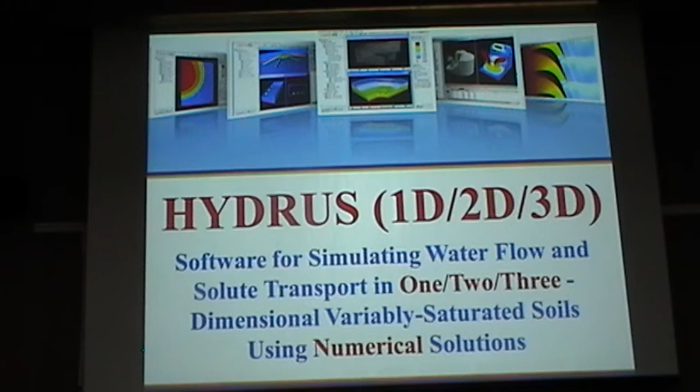Well, so obviously the platform for all this is Hydrus. And so the main thing, at least in the first part of my presentation, is basically to discuss some of these add-on modules to the Hydrus code. And you see here the modules which are currently available. So you have heard a lot about PHREEQC. Then we have a module called C-Ride, which simulates particle transport and particle-facilitated solute transport. Then we have a module called DualPerm, which focuses on preferential flow and solute transport.

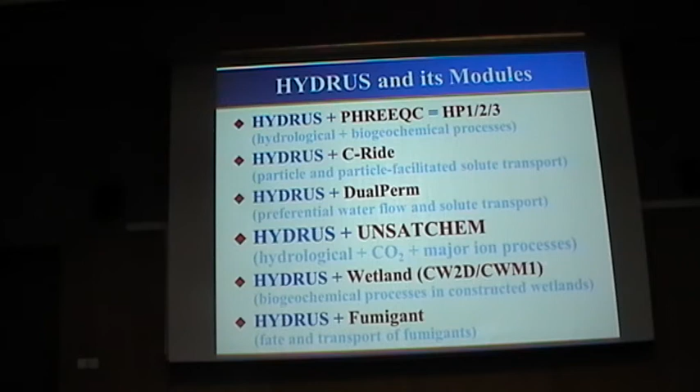We have a module UnsatChem, which simulates, in addition to flow, also carbon dioxide and major ion chemistry. Then obviously the Wetland module, and finally the Fumigant module. Well, PHREEQC, you have heard about it too, so I will skip these slides. I will just mention that most of those who are using FreakC in Hydrus are probably using it in Hydrus 1D.

And in Hydrus 1D we have these text editors where you specify all the input into the code. And we have spent a lot of time last year and dramatically improved that in Hydrus 2D/3D, where we integrated all these editors into one single window, from where you can work with all these editors. And we have provided a list of all the various keywords, which are the words which drive PHREEQC. And so you can simply click here and transfer those keywords without introducing any spelling errors. And we have added also various types of templates, so you can simply edit the text rather than typing it directly, which again simplifies that quite dramatically.

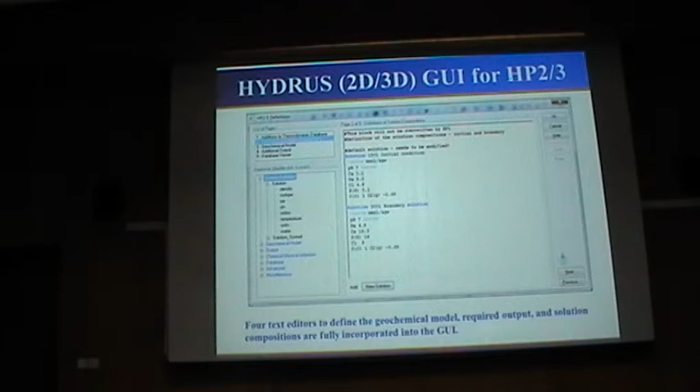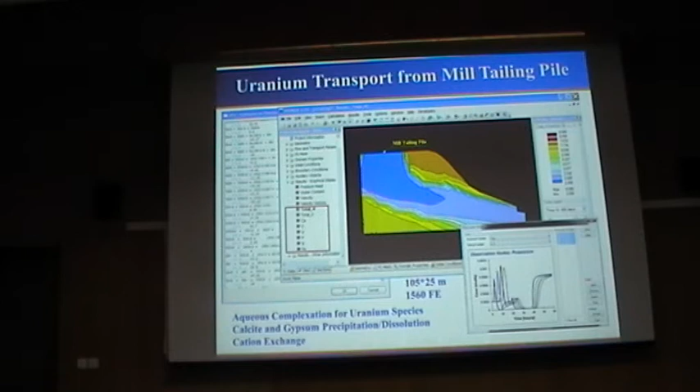And in the Hydrus GUI you have access to all these variables which you define in PHREEQC. Okay, well, now I want to give more information about this module, C-Ride, which focuses on the transport of particles and particle-facilitated solute transport. This module we developed only last year. We were contacted by the Syngenta company, and they want to use some of these technologies to deliver nutrients and pesticides.

And so, well, it is well known that many contaminants are relatively immobile, such as these radionuclides. They have retardation factors which go into thousands, but they are immobile because they are strongly sorbed to soil. But they can sorb not only to the soil or solid particles, they can also sorb to colloids, which often move faster than non-sorbing tracers.

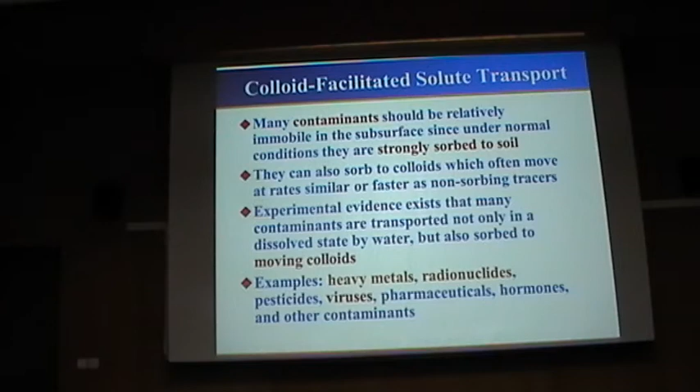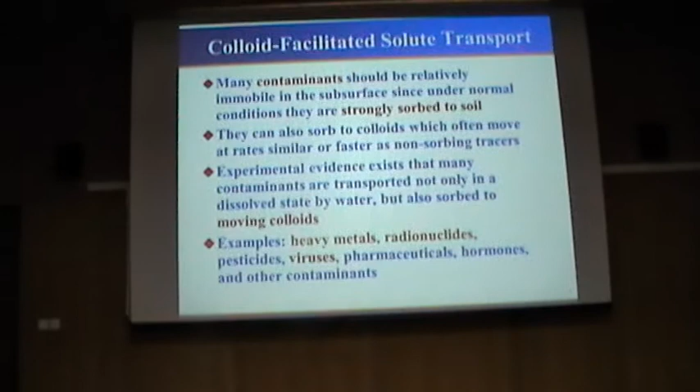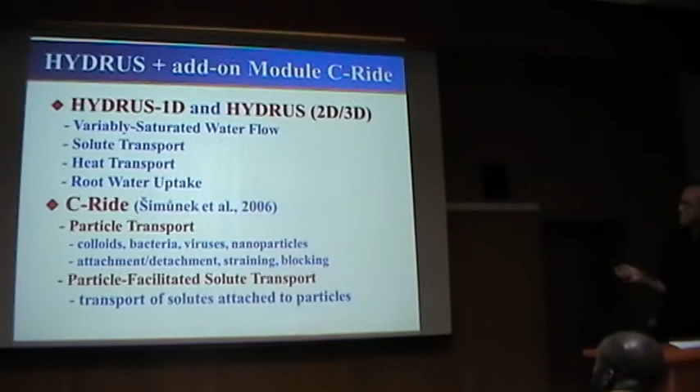And evidence exists that a lot of contaminants, such as heavy metals, radionuclides, and so on, are transported not only dissolved in water, but also sorbed to these moving colloids. And examples are listed here, so it's mostly heavy metals, radionuclides, but it certainly applies also to pharmaceuticals and other contaminants. So we have developed this C-Ride module, which uses Hydrus as a driving force.

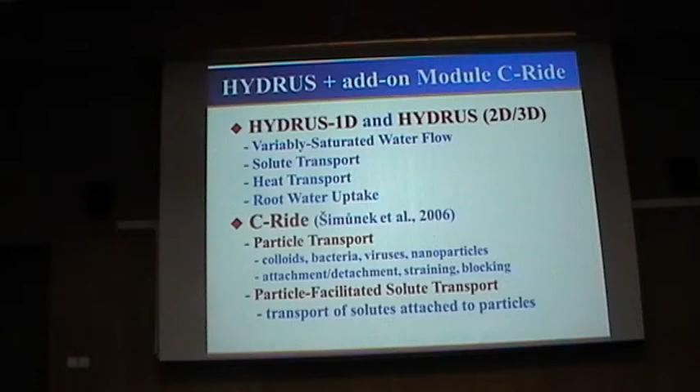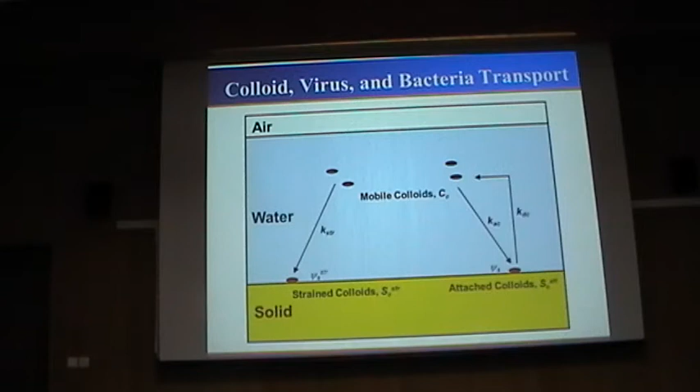In addition to that, there is particle transport, which standard Hydrus can do as well. And by particles I mean all the substances which have a certain size, such as colloids, bacteria, viruses, nanoparticles, etc. And the specialty of this module is particle-facilitated solute transport. So this schematic shows the main reactions involved in the transport of particles, such as attachment and detachment, which are chemical reactions, or straining, which is a physical reaction.

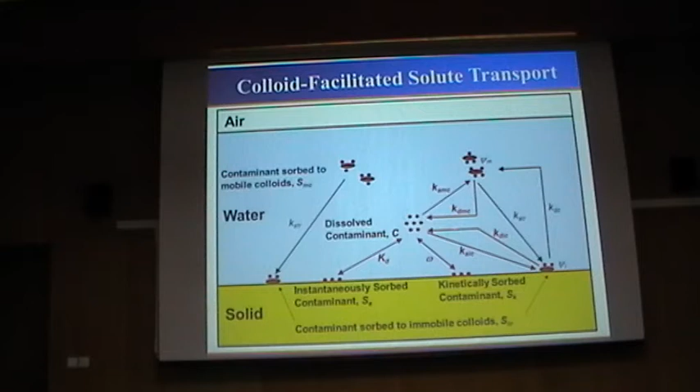And then this slide shows the main reactions for the transport of contaminants in the presence of colloids. And so you see the sorption, either kinetic or instantaneous, but you also see sorption to these mobile particles. And each arrow here is represented by either an ordinary differential equation or an algebraic equation. And so all these equations have to be solved simultaneously.

Bacteria acting as carriers for heavy metals is one of the special examples of colloid-facilitated transport. And what's important here is that bacteria are relatively large. They're at least 10 times larger than colloids. So they are excluded from small pores, and especially in saturated aquifers, they move mainly in the larger pores. And so they move much faster even than tracers or than water itself, and so they provide a vehicle for rapid transport of these contaminants.

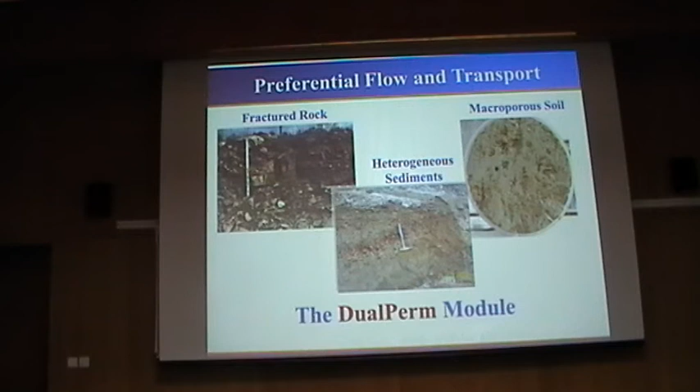Okay, another module is the dual permeability module, which focuses on preferential flow and solute transport. And preferential flow is one of the most frustrating processes, which really hampers our ability to make predictions of solute transport. And unfortunately, rather than being an exception, it's a very common phenomenon. And here I show several natural environments in which preferential flow occurs: fractured rock, macroporous soils, or various heterogeneous sediments.

And so for that we developed a suite of models, and you have seen application of some of these models yesterday. So we have a suite of models starting from uniform flow model, mobile-immobile, dual porosity, and dual permeability. This was all available in Hydrus 1D already for about 5 years, but this last one was not available in 2D. And last year I got some funding from the University of Calgary in Alberta, Canada, to develop this module and implement it into Hydrus 2D.

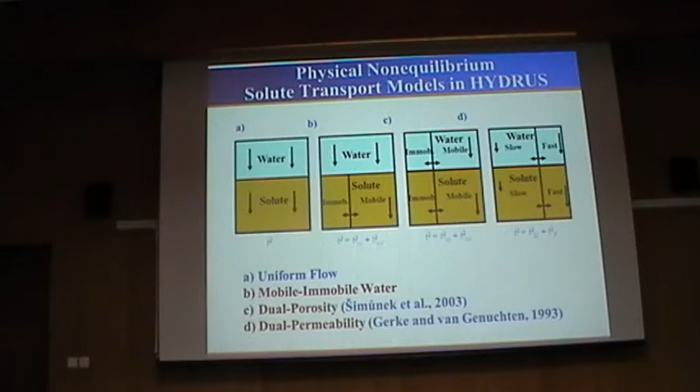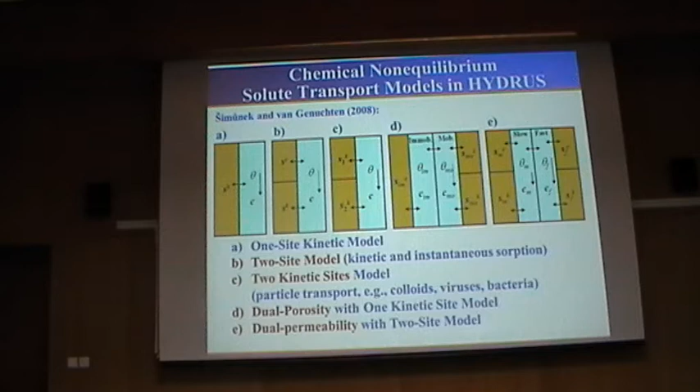These are the chemical non-equilibrium models which are available in Hydrus. The first 3 are the kinetic non-equilibrium models, and the last 2 combine both physical and chemical non-equilibrium. So this is chemical non-equilibrium included into the mobile-immobile or dual porosity model, and here in the dual permeability model.

Here again I show one simple application of that, for infiltration, basically ponded infiltration into the dual-permeability system. This slide shows the pressure heads in the matrix, so very slow movement of the moisture front. And then the next three slides show the moisture fronts in the fracture domain for different anisotropy, different combinations of anisotropy tensors.

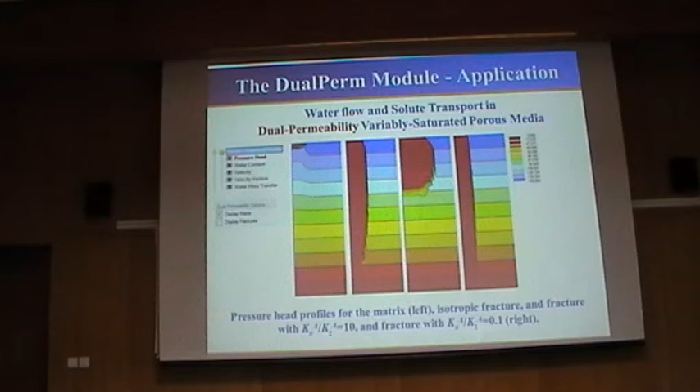So here it is faster in the vertical direction, this one is faster in the horizontal direction, and this one is isotropic. All these models are described in the manuals of Hydrus 1D, and in the specialized manual for the DualPerm module of Hydrus 2D, and they are also all described in this paper.

These models have a lot of parameters, and people always ask me how to select them, and I always direct them either to these two papers or to the papers of Radka Kodešová, who has a lot of experience with that, much more than me actually, on how to get the parameters.

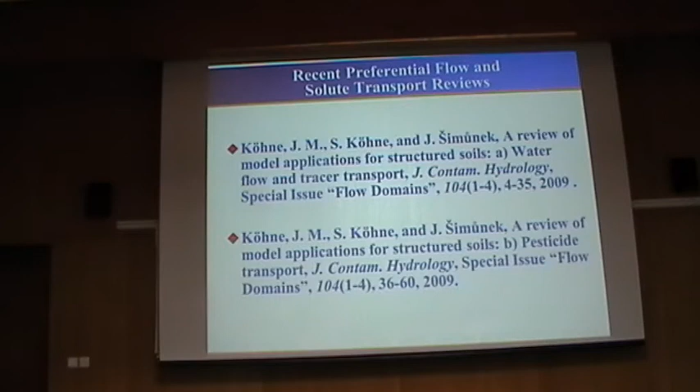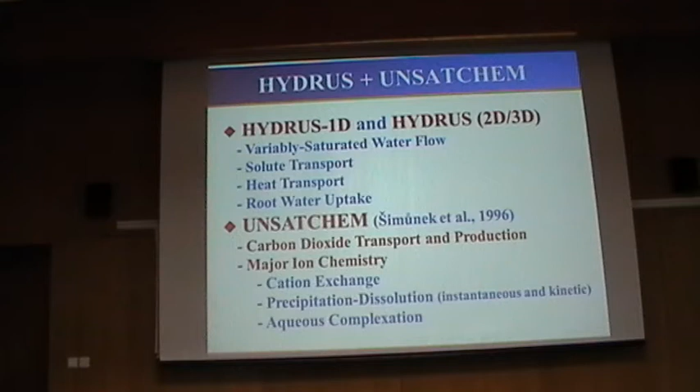Another module is the UNSATCHEM module. This module simulates carbon dioxide transport and production and major ion chemistry. This module was in Hydrus 1D for quite a while. It was developed quite a long time ago, but I think in 2005 we put it into Hydrus 1D, and a year or two ago we put it also in Hydrus 2D. This is the chemical system which this model considers. So these are major ions. Obviously there is no aluminium.

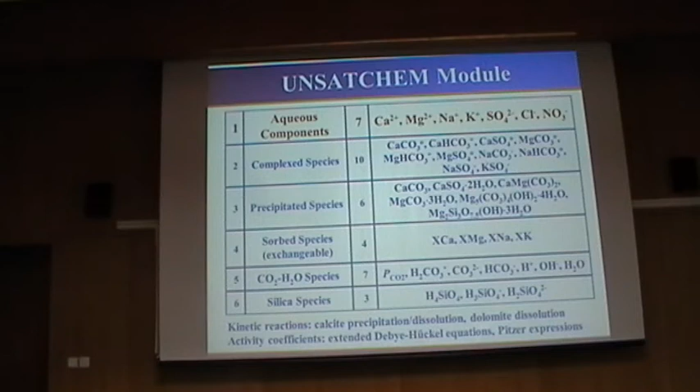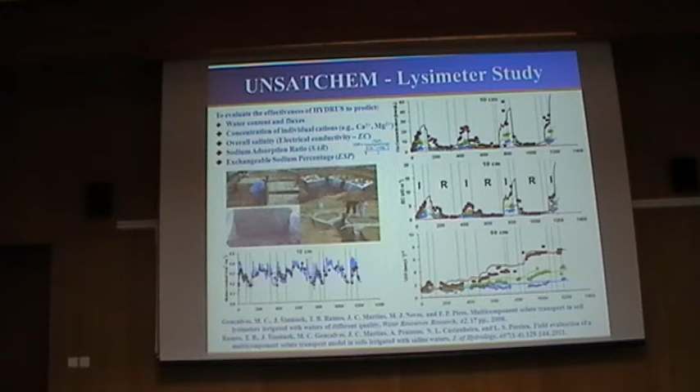There are a lot of environmental or agricultural applications for that. I have only one slide, so don't worry, I think you have a presentation on this topic. This just shows the application of UNSATCHEM to a lysimeter study in which water contents, sodium, electric conductivity, SAR, etc. were measured. Tiago Ramos will give a presentation later today on this.

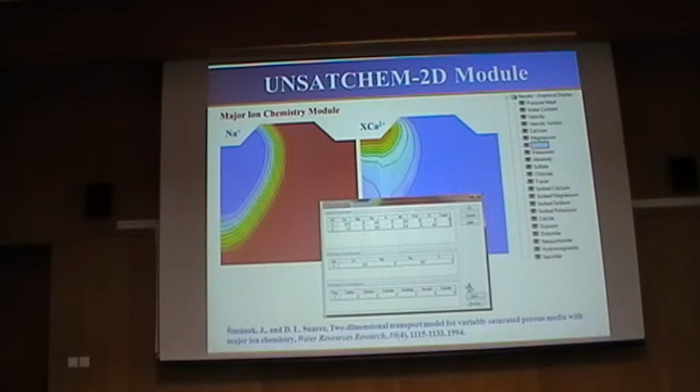And now we have it also in 2D, and it's fully supported by the graphical user interface with all the variables, with the possibility to display all these various exchangeable species, solid species, liquid species.

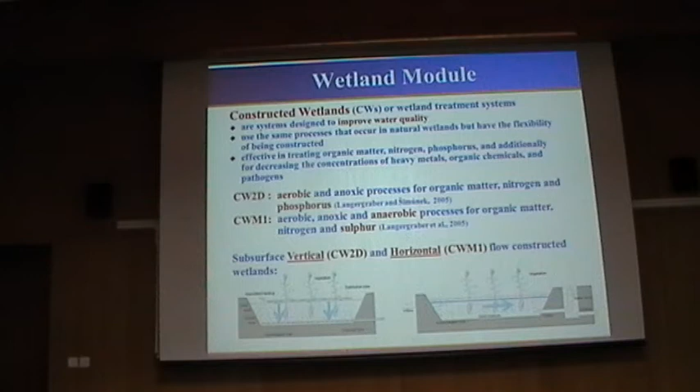Wetland module, I don't think I have anything except I left this slide there, so you can see the vertical flow wetlands and horizontal flow wetlands, which Günter said he didn't have this slide or something. No, I deleted it.

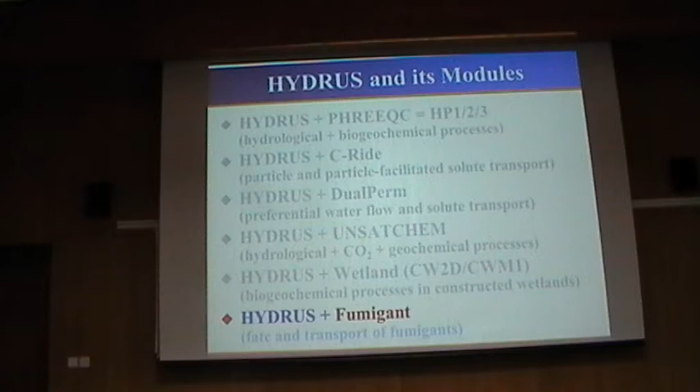The final module which I developed in the project for California EPA was the Fumigant module. Fumigants are chemicals which are used to sterilize the soil. They are highly volatile, so they are mostly in the gas phase. So the main transport mechanism is diffusion in the gas phase.

This specialized module deals with some special management technologies of applications of these fumigants, such as presence or absence of surface tarps, because they always place surface tarps to prevent these fumigants from going into the atmosphere, because some of them are endangering the ozone layer. And this tarp can have certain temperature dependence. The tarp is removed at a certain time, etc. So that's a specialized module.

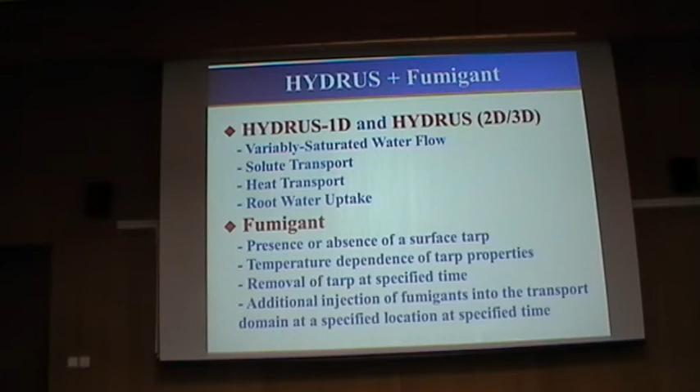We just recently had a paper in which we did sensitivity analysis of various parameters for different technologies of applying these fumigants. I would like to mention one thing, that if you see sudden changes in fluxes of volatile chemicals as well as gases, then it's not necessarily numerical oscillation. These fluxes can change quite dramatically for various reasons. This is just the effect of temperature.

But there are much more important factors, such as irrigation, which will basically stop those fluxes right away because it will close the pathway through which the fumigants can leave. I had a paper on this in 1992 where I show how quickly these fluxes can change. So taking a measurement like once a week doesn't give you any information.

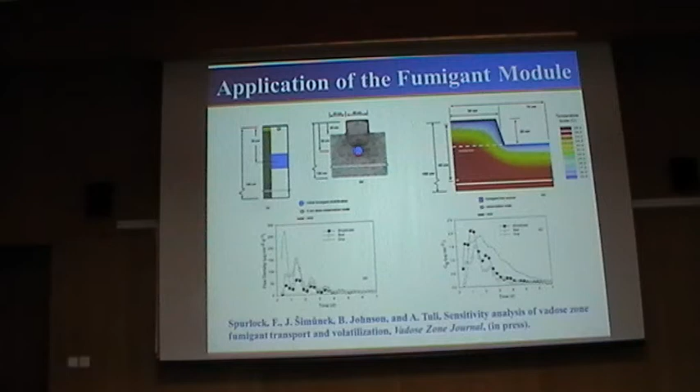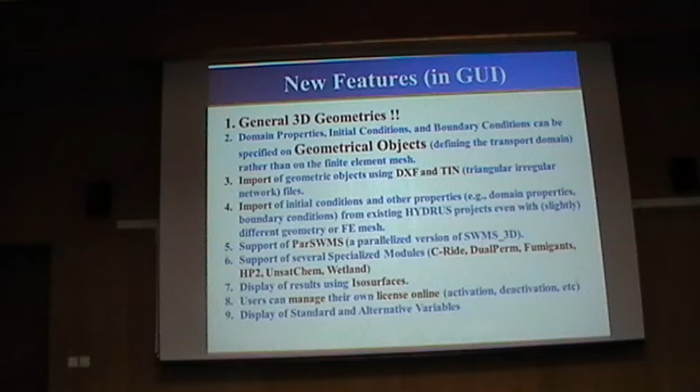So that was about the modules, and now some new features which we put in the Hydrus code. Last year we released version 2, and these are some of the features in version 2. We started supporting completely three-dimensional geometries, and we also allowed specification of various properties on geometrical objects, etc. I have slides on each of these.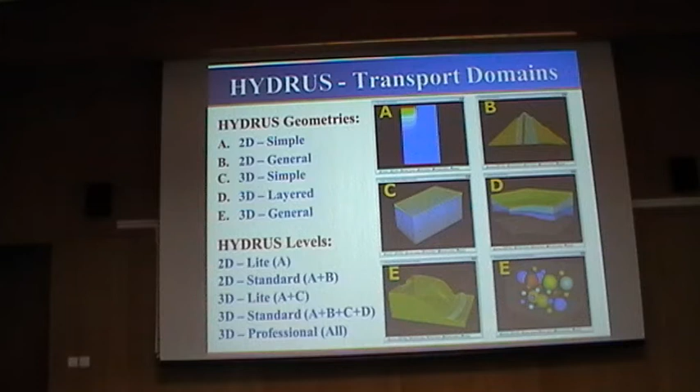So last year we released a version which we call 3D General or 3D Professional, in which you can develop practically any type of three-dimensional geometry. To be able to do this, we had to introduce some new additional objects by which you can define these geometries. So in addition to planar surfaces, we also have curved surfaces, and here's the list of these.

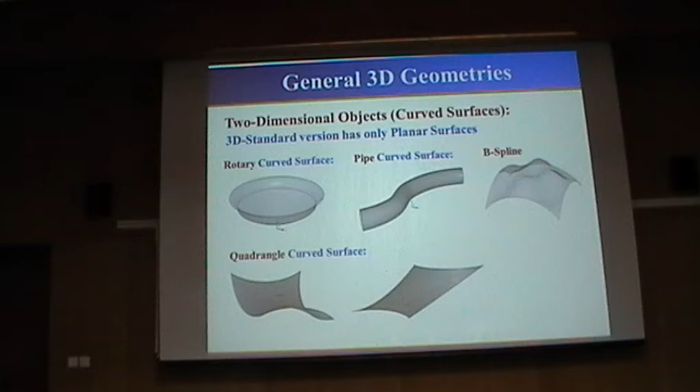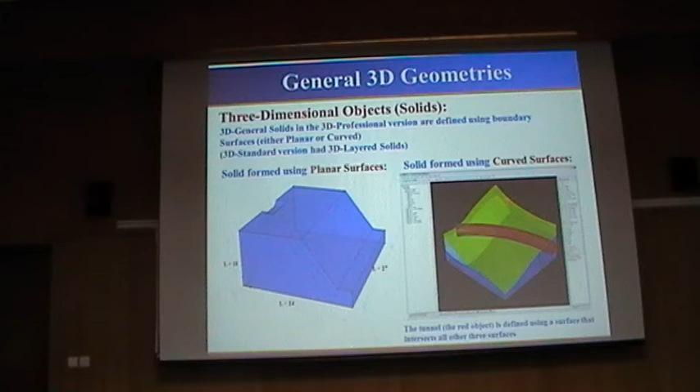These B-splines and quadrangles are the surfaces which are mostly used to define complex 3D geometries, but you can also have some pipes and rotary surfaces, etc. Here's an example of three-dimensional geometries. The first one defined simply using planar surfaces, the second one using these curved surfaces, pipes, etc. You can define very, very general geometries.

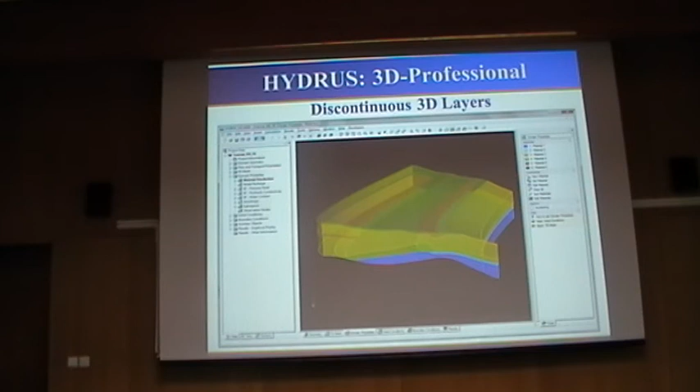You can have disappearing layers, etc. You can have very complex drainage systems. And you can also import complex geometries from DXF, TIN, and STL software, and these are some of the tests that we did.

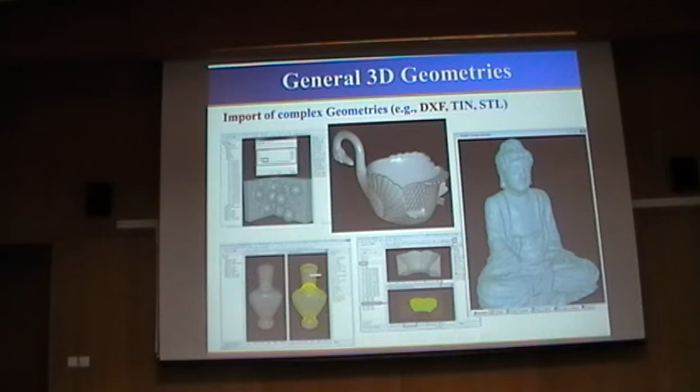About 10 years ago, I had a project where I was doing simulations of flow in the giant Buddha statue. At that time, we had to assume that Buddha is axisymmetrical, but now we could simulate it fully.

In the previous versions, you had to define properties and boundary conditions directly on the finite element mesh, and if you had to redesign the mesh, you would lose all that information. So now in the new version you can define properties on the geo objects, which are independent of the mesh. If you need to redefine the mesh, let's say because of some problem with the stability of the solution, or even if you have to change slightly the geometry, you don't lose that information—it is preserved.

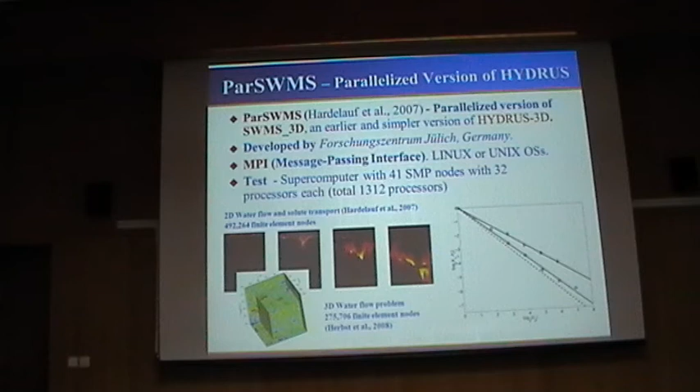We are pretty close to finishing development of our own parallelized code, which will not be meant for supercomputers, but for computers with multi-core processors. That's where the development is going now—I think you can get 8 or 16 cores on a computer right now.

So you can have different types of outputs which were not available before. Also, we changed the licensing system, so now users can control their license themselves online.

We always had complaints that we display only some standard variables—I thought usually that's enough if I show concentration in the liquid phase because you can calculate all the others from that. But on the request of many users, we added a lot of so-called alternative or derived variables. So you can display sorbed concentration, gas concentration, total concentration, different variants of it. Also for MODFLOW people, we added not only pressure, but total pressure and so on.

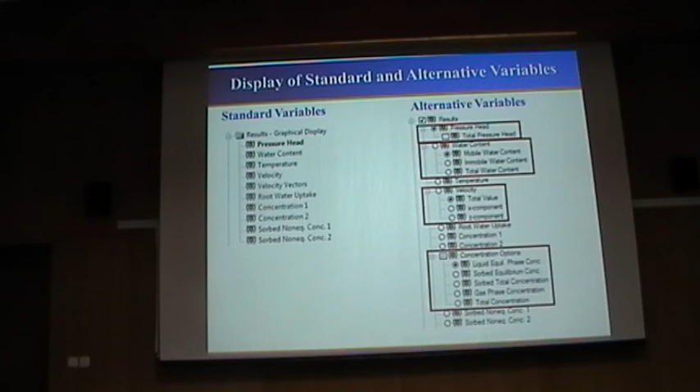We added several other simple options, such as: initial condition doesn't have to be specified in liquid phase concentration, it can be specified in total solute mass. That's important if you do the inverse problem, because if you optimize for KD and your initial condition is in terms of liquid phase concentration, you're changing mass during every run. Now you can specify the total mass, and the code will redistribute that between different phases, even if you change KD, KH, etc.

We also included a lot of different types of boundary conditions, and here I list only some of them—some are quite specialized for irrigation purposes. For example, we have subsurface drip boundary conditions where the flux of the dripper accounts for the back pressure, which was developed together with Naftali.

We have surface drip boundary conditions where the wetting area is dynamic, and so on. We also have an option for trigger irrigation—you can specify, select an observation node, select a triggering pressure, and once this pressure is reached, it's then applied to selected variables which you can choose. You can select irrigation rate, duration, etc.

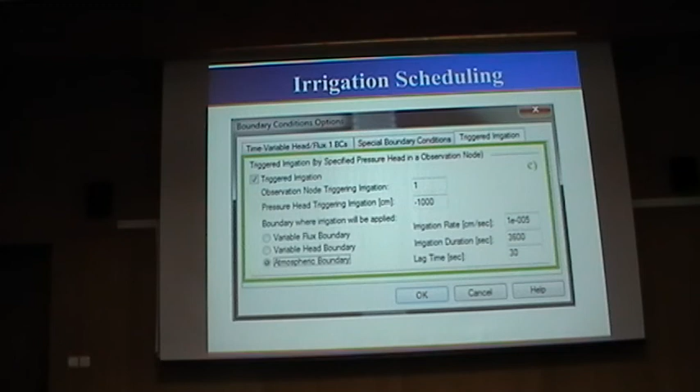Here's an example from an application that was just published, and since nobody is talking about it, I'm not going to either—I'll just save my time.

Both models now implement fully compensated root water and solute or nutrient uptake, which we developed in this paper with Jan Hopmans. The nutrient uptake is divided into passive and active, and you can turn off passive or active independently. So users have a lot of flexibility in defining their uptake functions.

With the release of the second version, the program suddenly became about 3 times faster due to some improvements in the coding, and so on.

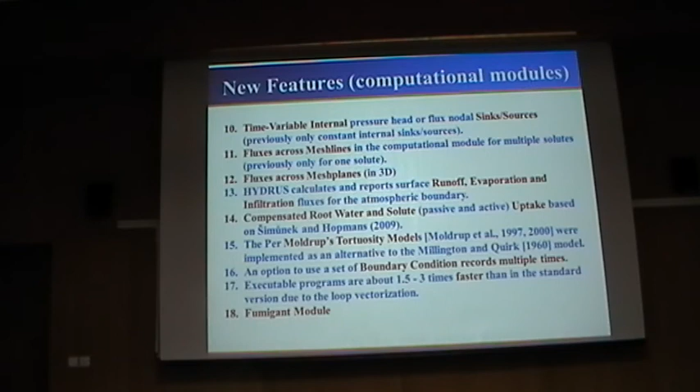We are working on some other modules. Some of them are already available, but since they are not particularly robust, we didn't include them in the standard version, but we simply put them on the website and people can download them. There is an overland flow module, and I will be returning to it this year and trying to make it more robust, because we have a project for overland flow of particles, bacteria or pathogens, so we need to make it better than it is.

There is a freezing module for 1D, which is available online again. We are planning to work also on the stability problems. With Jasper's group, we are always discussing implementing these global optimization techniques, but we'll see how that goes.

The overland flow module which we currently have - basically we describe the overland flow using the kinematic wave equation. It's linked with the atmospheric boundary condition, and then the overland flow can redistribute water over the surface.

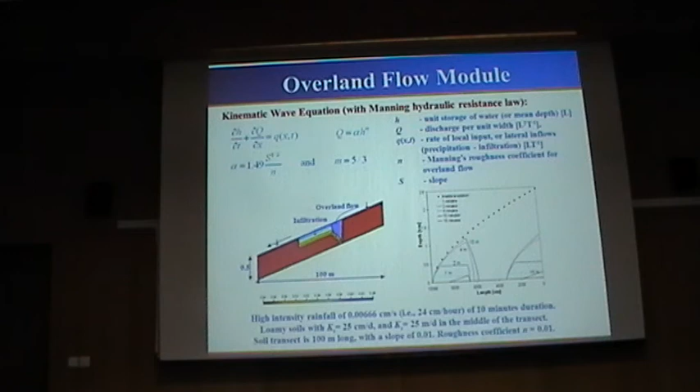And finally, last year or two years ago, we published this book, the Hydrus textbook, so let me make some advertisement here also. It's called Soil Physics with Hydrus: Modeling and Applications, and we try to explain different processes in the vadose zone hydrology using the Hydrus code. It was written mainly by David Radcliffe.

That's all I have, so I got finished before the clock. So if you have any questions.

So thank you, Jirka. If there are any questions or suggestions for improvement, you can ask me. Wish list - I was planning to put there also a wish list, and it would be to Mirek, who is not here, so I can say, stop changing those damn icons.

Yes, I have some suggestions about the improvement of warnings. If the user selected a coarse grid for the finite element, Hydrus can suggest refining the grid to get better results. If he selected a soil model which is not suitable, it should suggest changing this - this is not suitable with this - and many other improvements. If the mass balance is huge, it should stop and suggest refining or whatever.

Yeah, well, it's very difficult to do that, right? Because Richards' equation is a highly nonlinear equation, and how fine the grid should be depends on so many factors that I tried to write some kind of guidelines, which I posted online. I think it's called Notes on Spatial and Temporal Discretization. Because discretization depends very much on how nonlinear these hydraulic properties are, right?

Different soils are differently nonlinear, so different soils require different discretization. For example, loam, which we were using in the course, is the least nonlinear, and so Hydrus works almost on any mesh for loam. The most nonlinear soils, on the other hand, are the coarse textured soils - gravel or sands - and for that you need very fine discretization.

But then again, it depends also on the boundary conditions, right? Because if you have ponding infiltration, the fronts are very sharp in the sand or gravel. And to be able to describe these fronts, you need several nodes. So if the front is 5 centimeters, you need several nodes to describe that. If you have loam, and the front is half a meter long, then you need the same number of nodes for that.

So it depends on the nonlinearity of the soils, it depends on the boundary conditions, because obviously ponding is the worst boundary condition. If you have small fluxes, like daily values, then you don't need fine discretization. If you then specify 15-minute fluxes, then you need much finer discretization. So there are so many factors that it's difficult to just put artificial intelligence into the code.